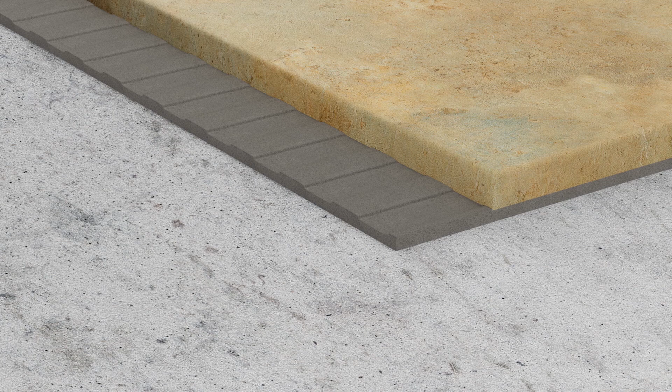Ceramic and stone tiles are the ideal surface coverings because they're beautiful, durable, hygienic, and easy to maintain. However, concerns over cracking can be a barrier to the selection of tile as a floor covering. The Schluter-DITRA uncoupling membrane is specifically designed to allow the installation of ceramic and stone tile over any even and load-bearing substrate.

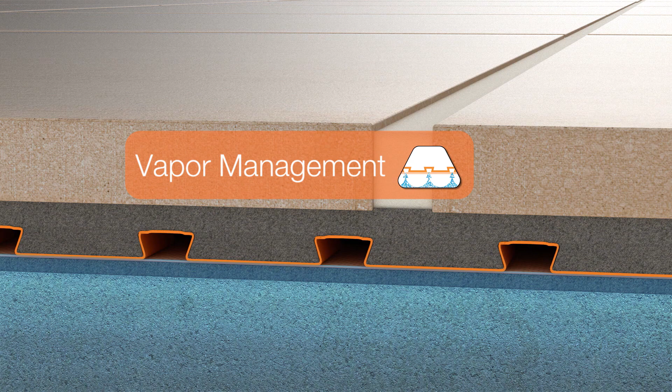DITRA performs 4 essential functions to help ensure success. Uncoupling allows the tile and substrate to move independently and neutralizes stresses that could otherwise cause cracked tile and grout. Waterproofing protects common moisture-sensitive building materials like plywood, OSB, and gypsum. Vapor management protects the tile assembly from the effects of residual moisture in the substrate. And support ensures the tile covering will remain intact when exposed to traffic.

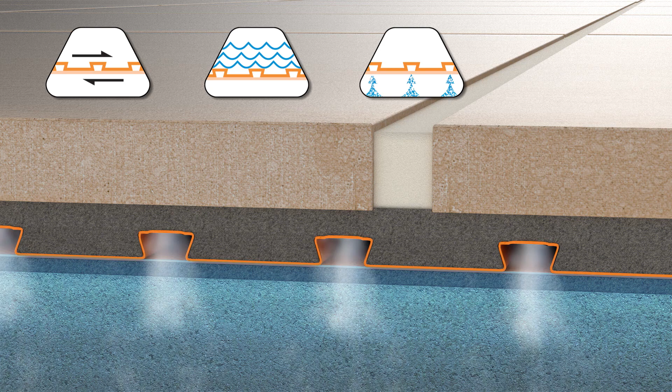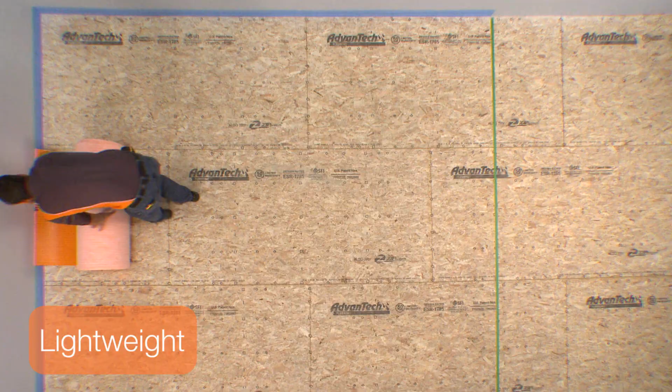The integration of DITRA's uncoupling, waterproofing, vapor management, and support functions makes it the universal underlayment for ceramic and stone tile. In addition to the functional benefits, DITRA is a practical solution that fits the needs of the installer. DITRA is lightweight, only 40 pounds per 323 square foot roll. This makes it easy to handle and transport to the job site.

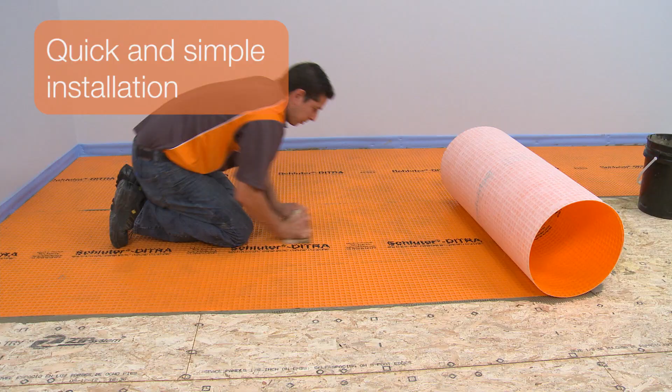DITRA is installed as quickly as you can spread thin-set mortar and requires no special tools or fasteners. Tile can be set immediately over the DITRA membrane, thus saving time on projects. With over 25 years as the industry leader in uncoupling technology, DITRA continues to provide successful, long-lasting tile installations.

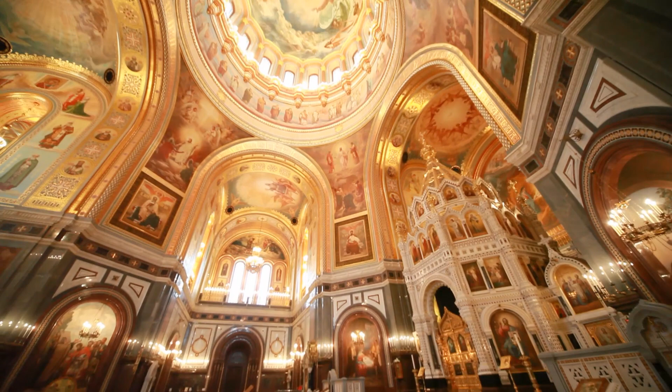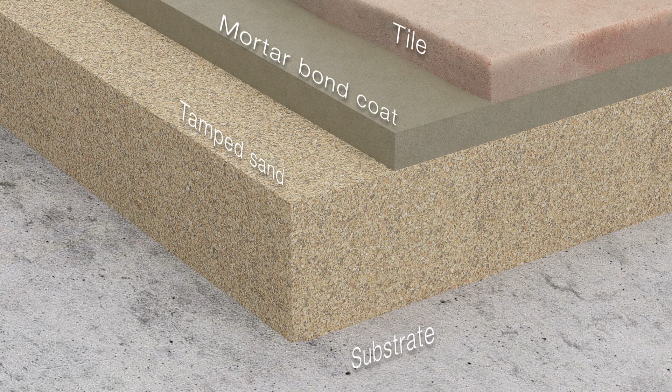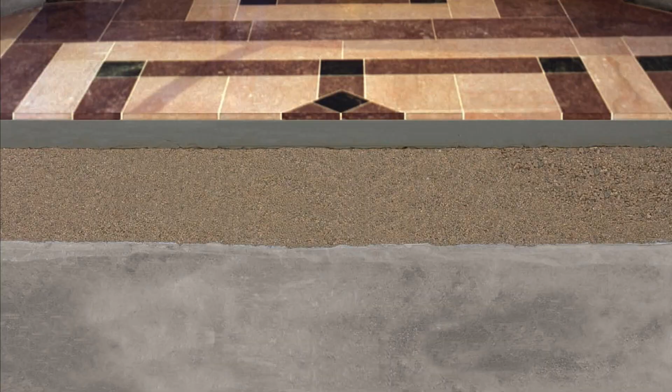Have you ever visited a centuries-old cathedral and wondered how the tile floors installed hundreds of years ago are still intact today? The secret is a layer of tamped sand placed between the structure and the tile assembly. The sand allowed the tile covering to move independently from the substrate. This uncoupling of the 2 layers prevented movement in the substrate from producing damaging stresses in the tile. In addition, the sand effectively distributed heavy loads to support the tile covering. The combination of uncoupling and support ensured lasting installations.

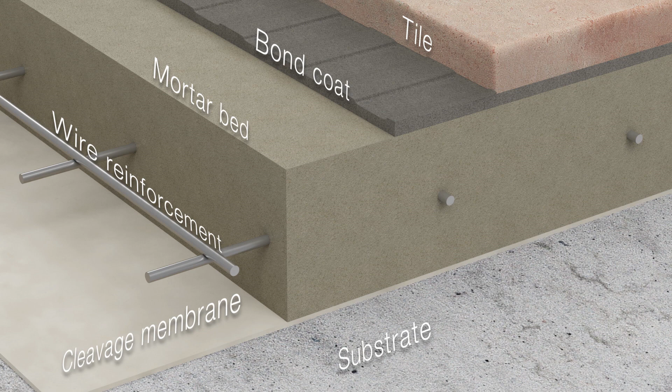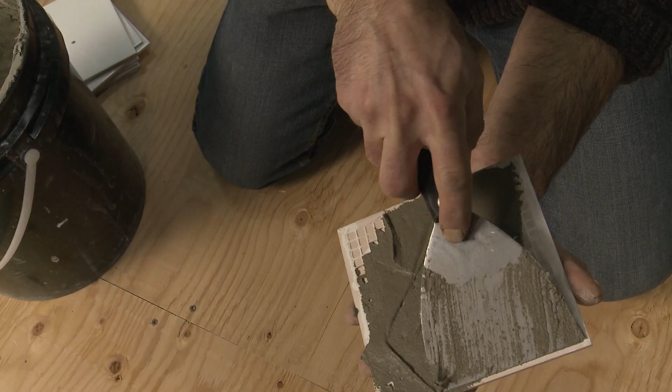A more recent installation method that functioned on the same principles is the wire-reinforced mortar bed over a slip sheet or cleavage membrane. In these applications, the cleavage membranes allowed for independent movement between the tile and the substrate, while the mortar bed provided the necessary support. Building practices and tile installation methods have changed considerably since the sand stratum method was commonly used.

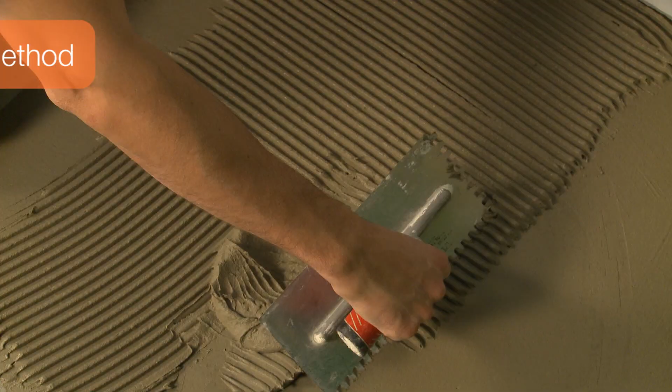The most fundamental change in the tile industry was the introduction of thin-set mortars in the 1960s. Originally designed to be used as bond coats in conjunction with the mortar bed method, these materials were eventually used to bond tiles directly to the substrate. Although the direct bond method was convenient and allowed thinner and lighter tile assemblies, the benefits of uncoupling were lost. When the tile is rigidly connected to the structure, movement in the substrate can produce damaging stresses in the tile covering.

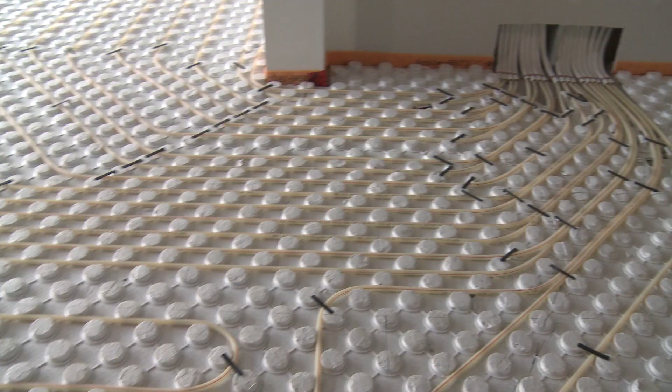Despite the drawbacks, the direct bond method became the standard for tile setting in most of North America. The risks associated with this method increased with the use of large format tiles, heated floor systems, fast-track building methods, and unstable materials such as plywood and OSB. Today, the need for uncoupling is greater than ever. In 1987, Schluter-Systems introduced the DITRA uncoupling and waterproofing membrane in an effort to improve the performance of thin-set tile assemblies.

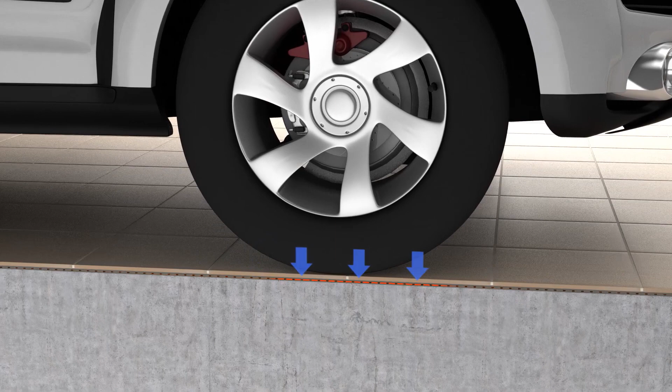DITRA was configured to provide lateral flexibility to allow independent movement between the tile covering and the substrate. This is the basis for the uncoupling function. The shape of the membrane also ensures proper support for the tile through the columns of mortar formed in the cavities on the top of the matting.

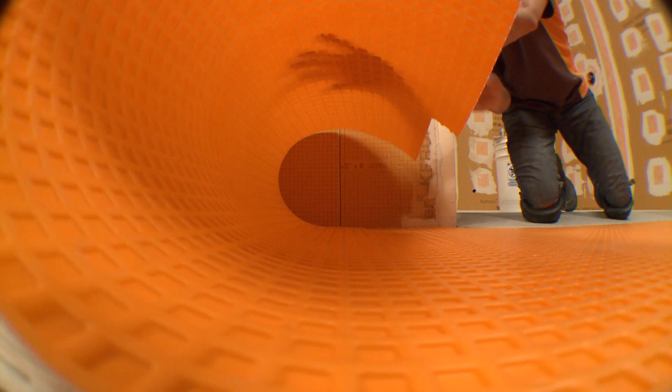DITRA provides reliable tile applications through the ancient wisdom of uncoupling and support, as well as the modern requirements of waterproofing and vapor management, in a method that matches today's building practices and tile installation techniques. Applying centuries' worth of knowledge has helped create long-lasting tile installations with the use of Schluter-DITRA.

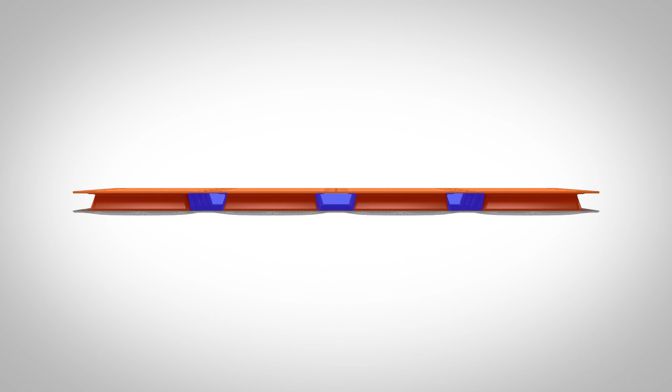Schluter-DITRA provides 4 essential functions to address the challenges presented by common tile substrates. DITRA is an uncoupling membrane with a grid structure of cut-back cavities and an anchoring fleece laminated to the underside. The cut-back cavities also create free space within the DITRA. The membrane is bonded to the substrate using thin-set mortar. Tile is installed over the membrane using the thin bed method. The cavities are filled with thin-set mortar, and additional mortar is combed over the top.

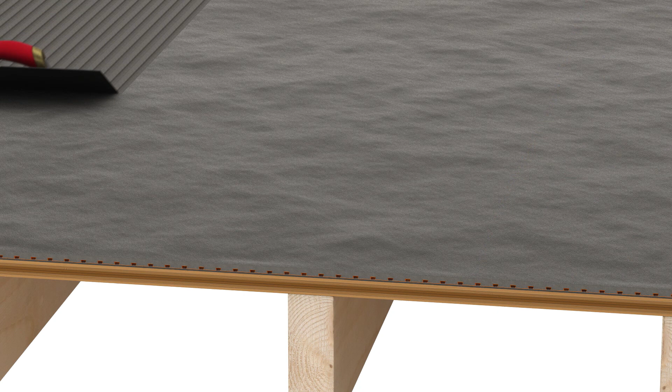The tiles are embedded in the mortar and grouted. Now, we'll demonstrate the 4 functions. All floors will expand and contract with changes in moisture content and temperature at a different rate than the tile. DITRA provides uncoupling through its open rib structure, which allows the substrate and the tile to move independently. This prevents the substrate movement from building up stress in the tile covering that could otherwise cause damage, like cracks.

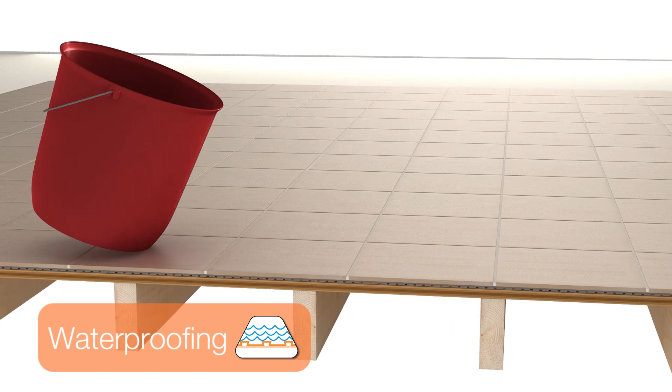Floors will also bend and deflect under load. The uncoupling function prevents this movement from causing damaging stresses in the tile covering as well. Tile coverings are not waterproof. Water can get through the tile covering to the substrate below. DITRA provides reliable waterproofing to protect moisture-sensitive substrates from water exposure.

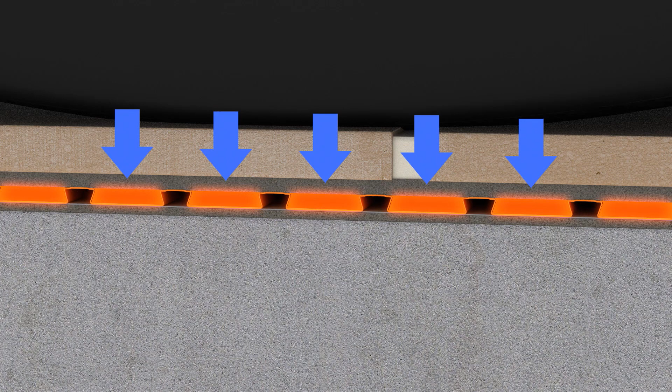The free space on the underside of DITRA provides a route for excess moisture and vapor to escape from the substrate. DITRA's vapor management function allows for tile installation over concrete cured less than 28 days and concrete on grade passing vapor. Loads are transferred from the tile covering through column-like mortar structures formed in the membrane to the substrate below. This design ensures tiles are properly supported when exposed to traffic.

The integration of uncoupling, waterproofing, vapor management, and support addresses the challenges presented by common tile substrates, such as plywood, OSB, concrete, and gypsum. This makes DITRA the universal underlayment for ceramic and stone tile.

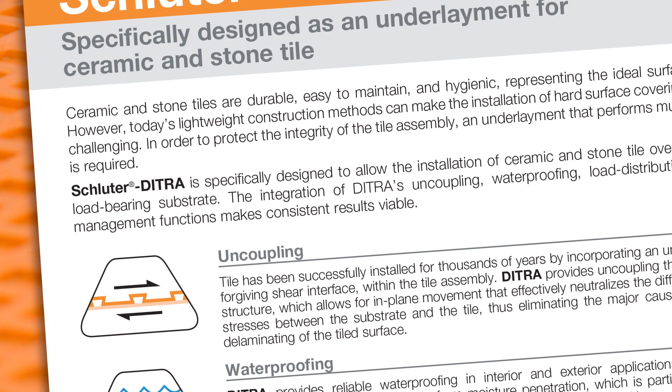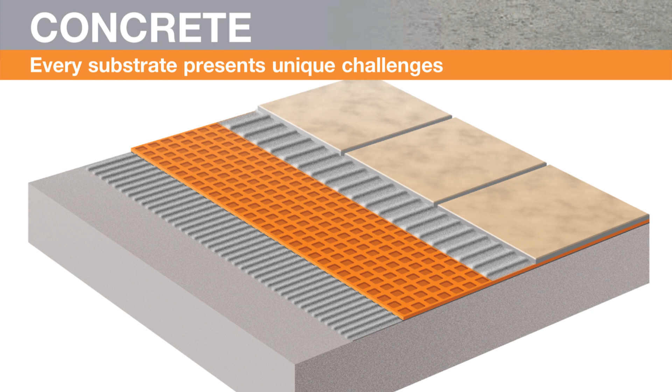The combination of DITRA's 4 functions allows for the installation of ceramic and stone tile over almost any even and load-bearing substrate. Typical substrates include plywood and oriented strand board, or OSB, including applications over joists spaced at 24 inches on center, young concrete, cracked concrete, and pre-stressed or post-tensioned concrete, poured gypsum underlayments, and heated floors, including hydronic and electric applications. Details for each of these substrates are contained within the DITRA Installation Handbook.

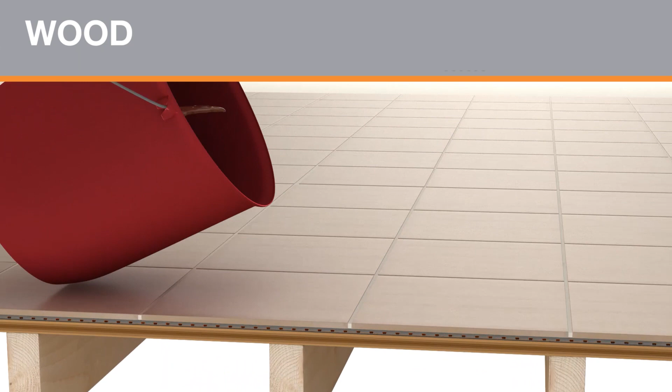Wood floors are subject to expansion and contraction with changes in moisture content and will bend and deflect under load. DITRA's uncoupling function protects the tile covering against these potentially damaging movement stresses. Furthermore, DITRA's waterproofing function guards moisture-sensitive wood materials against water infiltration.

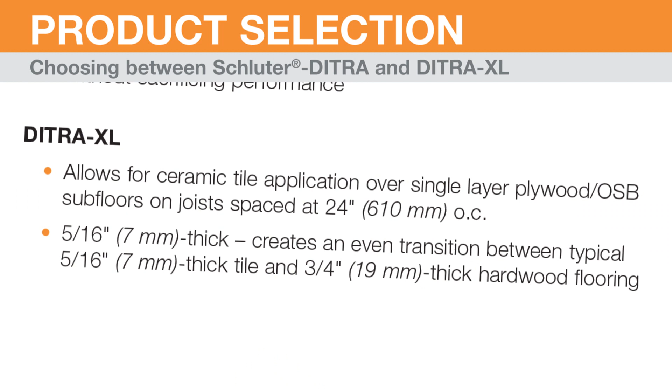Schluter-DITRA XL provides the same essential functions as DITRA, but is approximately twice as thick for increased uncoupling capacity. DITRA XL is optimized for use over bending and deflecting substrates, such as plywood and OSB. For example, DITRA XL allows for ceramic tile applications over single-layer plywood or OSB subfloors on joists spaced at 24 inches on center. It also creates an even transition between typical tile and hardwood flooring.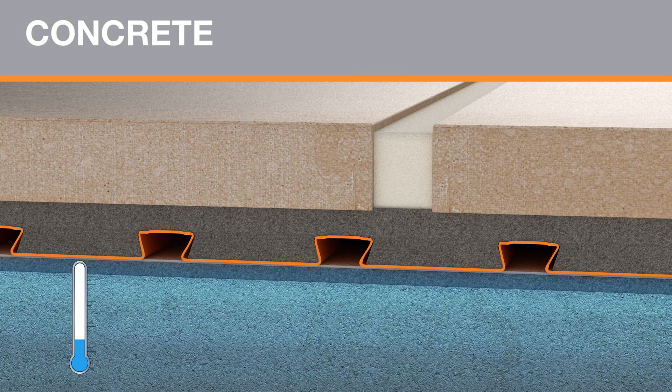Concrete is often thought of as a stable material, but it will expand and contract at twice the rate of tile with changes in temperature. Concrete also shrinks as it cures and dries after placement. These deformations make DITRA's uncoupling function essential. DITRA's vapor management function also enables tile to be installed over young concrete and concrete on grade subject to vapor emissions from below.

Similar to concrete, poured gypsum floors will expand and contract faster than tile with changes in temperature. This increases the need for uncoupling to protect the covering against movement stresses. Poured gypsum floors must dry out to gain strength and are sensitive to the reintroduction of moisture. DITRA's waterproofing and vapor management functions address these issues for reliable tile installations over gypsum.

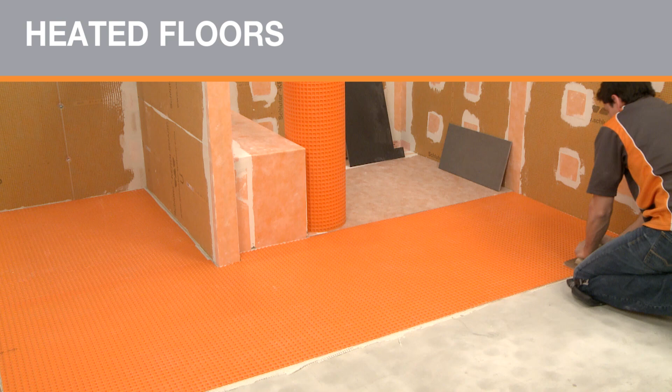Along with the substrate challenges already mentioned, movement stresses are magnified in heated floors, making uncoupling a particularly important feature of the tile assembly. The open channels below the DITRA can also promote even heat distribution to limit the potential for thermal striping.

Schluter-Systems also offers DITRA Heat, the only electric floor warming system that directly incorporates uncoupling to prevent cracked tiles and grout. Heating cables can be placed wherever floor warming is desired. Leveling compounds are not required to encapsulate the cables, which makes for a quick and easy installation. The integration of DITRA's uncoupling, waterproofing, vapor management, and support functions provides lasting installations over a wide range of substrates.

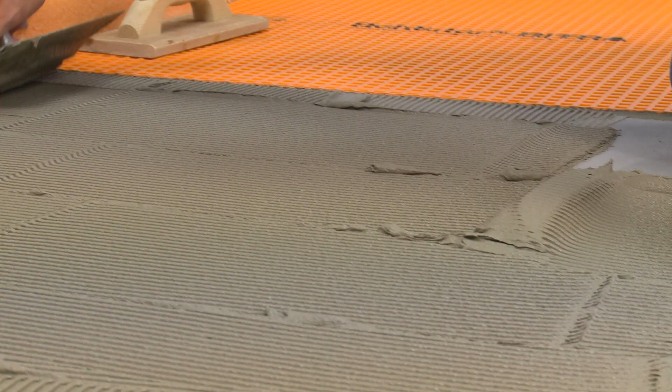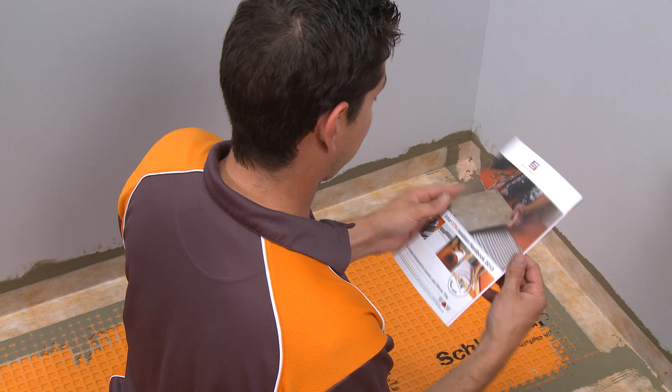Schluter-DITRA is specifically designed to allow the installation of ceramic and stone tile over any even and load-bearing substrate. The first step in a successful project is planning. The Schluter-DITRA Installation Handbook includes comprehensive installation guidelines and warranty criteria. The planning process starts by searching for the detail applicable to your project based on the substrate, tile type, and other factors. All requirements in the handbook are important. Please pay close attention to the setting materials and movement joints requirements when planning any DITRA project.

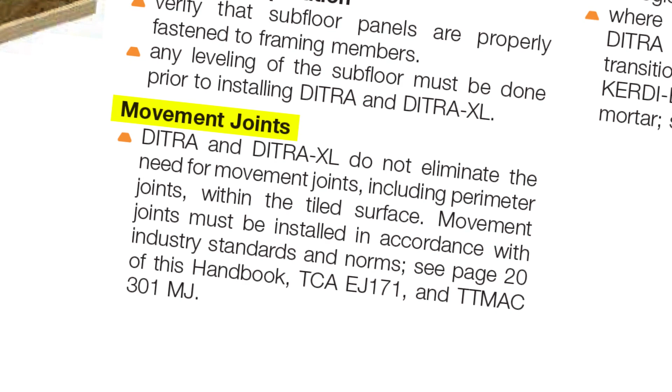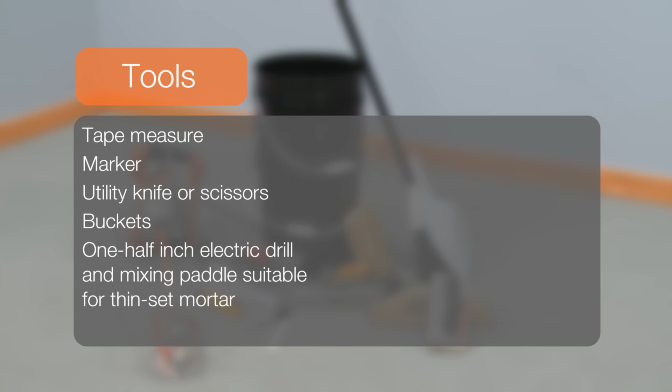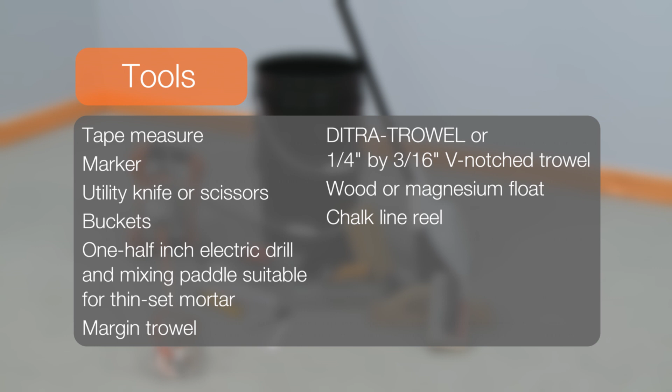Now we're ready to prepare for the installation. It is important to have a perimeter movement joint throughout the tile assembly. One option, as shown here, is to fasten a strip of sill seal, a compressible polyethylene gasket, to the surrounding walls to ensure a consistent joint along the perimeter.

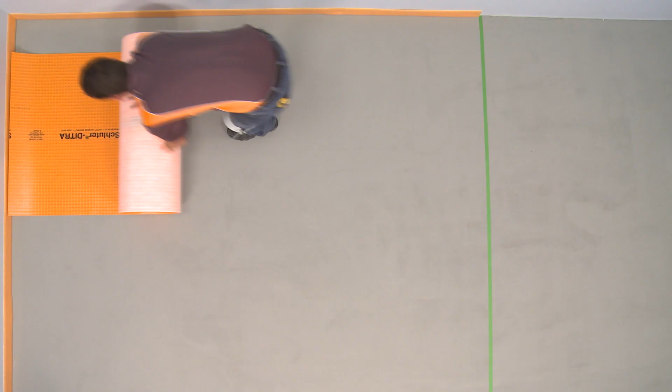The substrate must be clean, even, and load-bearing. Any leveling of the subfloor must be done prior to installing DITRA. Sweep the floor to remove any debris. Measure and cut the matting using a utility knife or scissors. Clean any dust from the substrate with a damp sponge. Now, we're ready to begin the installation.

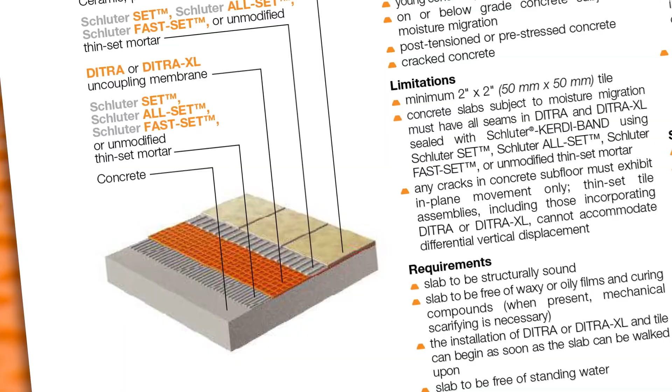DITRA is installed simply and easily with thin-set mortar. Any of the Schluter thin-set mortars can be used for installation of the matting over concrete. If you are not using a Schluter mortar, an unmodified thin-set mortar is used to install the matting over concrete. Always verify the proper type of mortar required to install DITRA based on the substrate. The mortar is mixed to a fairly fluid consistency, but still able to hold a notch.

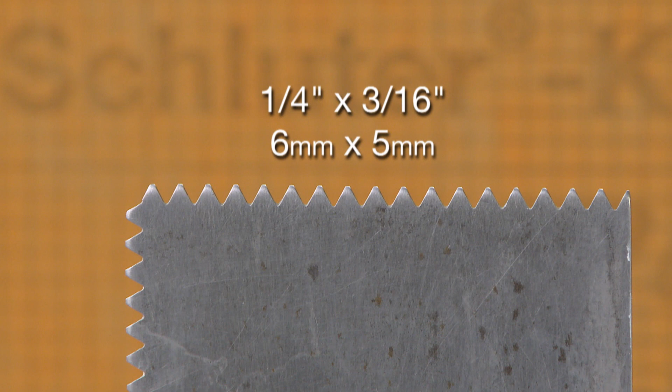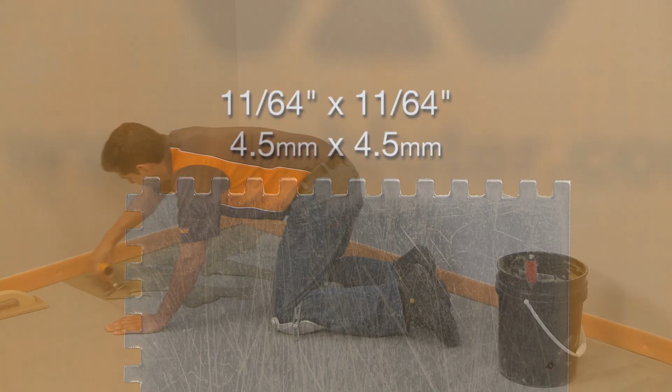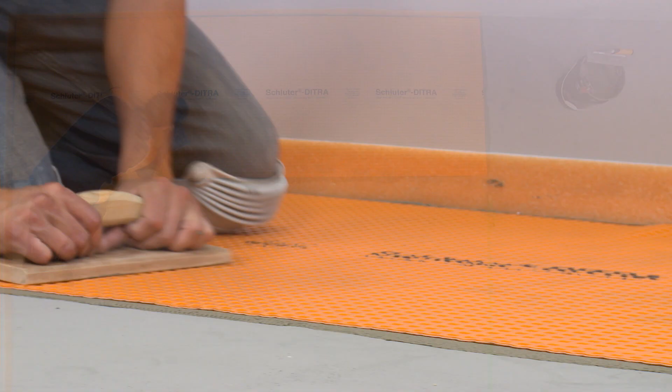A 1/4 inch by 3/16 inch V-notch trowel, or the Schluter-DITRA trowel, which features a 4.5 mm by 4.5 mm square notch design, is used to apply the mortar. Apply a thin layer of the mortar with the flat side of the trowel to produce solid contact with the substrate, and then comb additional mortar using the notch side of the trowel. Apply the DITRA fleece side down and solidly embed in the mortar using a float or the DITRA roller.

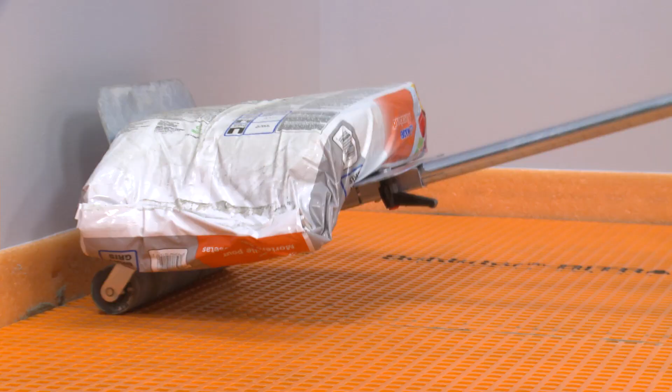When using the DITRA roller, place a weight on the shelf and slowly move the roller from one end of the matting to the other, slightly overlapping successive passes. Bags of thin-set mortar or grout or boxes of tile can be used as weight, provided the total weight is kept under 75 pounds. Make sure to observe the open time of the thin-set mortar. If the mortar skins over, remove and reapply fresh mortar before installing the membrane.

The risk of skinning is increased when installing a longer run of DITRA. Applying the mortar and embedding the membrane in shorter sections will help avoid this problem. When bonding DITRA to particularly dry, porous concrete, the slab should be moistened to saturate the concrete and help prevent premature drying of the mortar. Excess or standing surface water must be removed prior to installation.

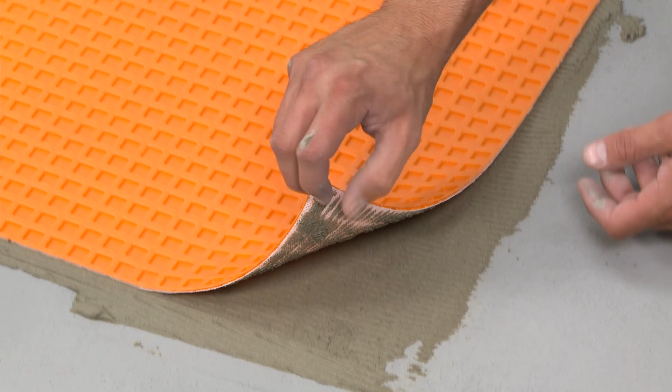Lift up a corner of the membrane to check coverage. Proper installation results in full contact between the fleece webbing and the thin-set mortar. Re-embed the membrane. Coverage may vary with mortar consistency, angle at which the trowel is held, membrane application, and other factors. If full coverage is not achieved, remove and reapply, making sure to observe proper installation techniques.

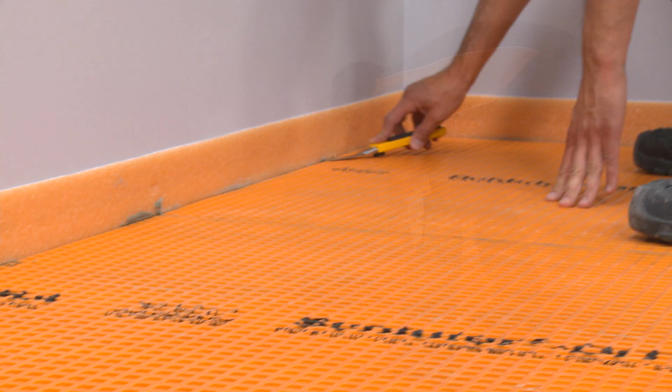For DITRA XL, use a 1/4 inch by 1/4 inch square notch trowel or the DITRA Heat DITRA XL trowel, which features a 1/4 inch by 1/4 inch square notch design. This process is repeated over the entire floor. Since we'll be installing a movement joint profile at the floor-to-wall transition, we need to cut the sill seal above the DITRA. Otherwise, we would leave the gasket in place until after the tile was set and grouted. The installation of the DITRA membrane is now complete.

Floors can be made fully waterproof with DITRA if desired by sealing seams and floor-to-wall transitions with Schluter-Kerdi waterproofing accessories. The Kerdi accessories can be installed using any of our Schluter thin-set mortars or an unmodified thin-set mortar. The mortar is mixed to a fairly fluid consistency, but still able to hold a notch. A 1/4 inch by 3/16 inch V-notch trowel or the Schluter-Kerdi trowel, which features a 1/8 inch by 1/8 inch square notch design, is used to apply the mortar.

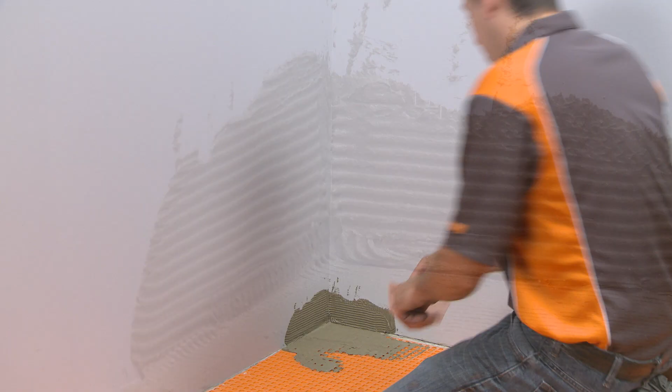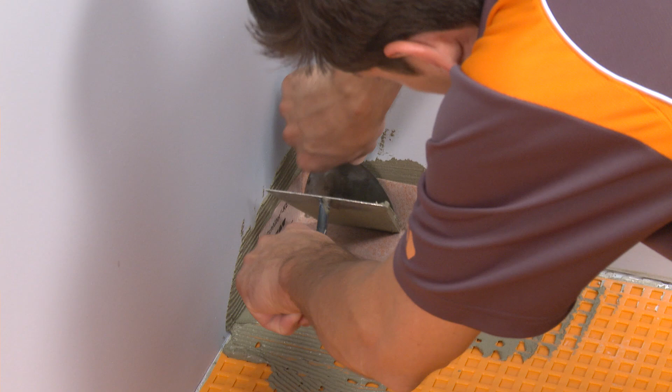Apply thin-set mortar to the area where the Schluter-Kerdi-Kereck corners are to be installed. Fill the cavities in the DITRA matting and comb additional mortar using the notched side of the trowel. Embed the Kerdi-Kereck into the thin-set mortar using the flat side of the trowel or a drywall finishing knife. Corner installation may be simplified by holding one side of the corner in place while embedding the other side of the corner in the mortar.

Schluter-Kerdi-Band waterproofing strips are used to seal seams and floor-to-wall connections. The band may be creased prior to installation to help maintain tight corners and simplify subsequent tile setting. Apply thin-set mortar to the area where the Kerdi-Band is to be installed.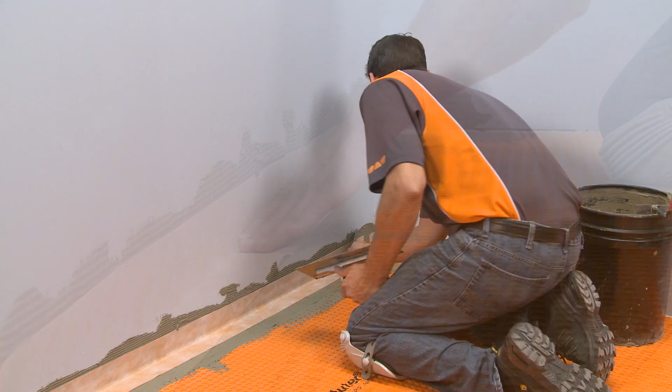Embed the Kerdi-Band in the thin-set mortar using the flat side of the trowel to ensure full coverage and remove air pockets. Note that a 2-inch overlap can be achieved at Kerdi-Kereck corners without continuing the Kerdi-Band all the way to the corner. This will limit buildup of the membrane in these areas. This process is repeated at remaining floor-to-wall transitions and DITRA seams. Always ensure that a minimum 2-inch overlap is achieved at all locations.

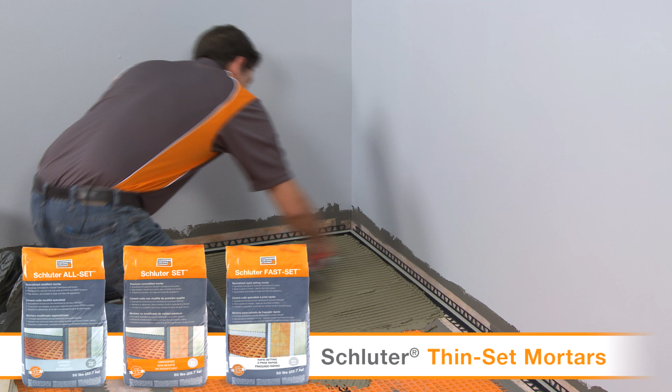The waterproofing application is now complete. Tile may be installed immediately over DITRA using any of our Schluter thin-set mortars or an unmodified thin-set mortar. We have already figured out our tile layout and have applied chalk lines to guide our installation. Hairspray helps ensure the chalk doesn't easily wipe off the membrane. The hairspray will not act as a bond breaker because the thin-set mortar is mechanically locked into the top of the membrane.

Fill the cutback cavities with thin-set mortar. Then, comb additional mortar over the matting using a notched trowel that is appropriate for the size of the tile. Back-buttering large format tiles is a useful way to help ensure proper coverage. The skim coat can fill in the concave area on the back of the tile and improve contact with the mortar combed on the substrate.

Solidly embed the tiles in the setting material, making sure to observe the open time of the mortar. Slide the tile back and forth to collapse the mortar ridges and transfer the mortar to the back of the tile. Periodically remove a tile to check coverage. Run a margin trowel through the bond coat and slide the tile before pulling up to avoid creating tension on the surface of the DITRA. This is especially important soon after the matting installation.

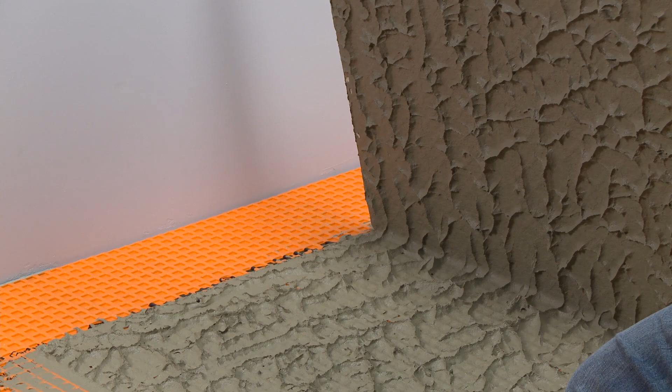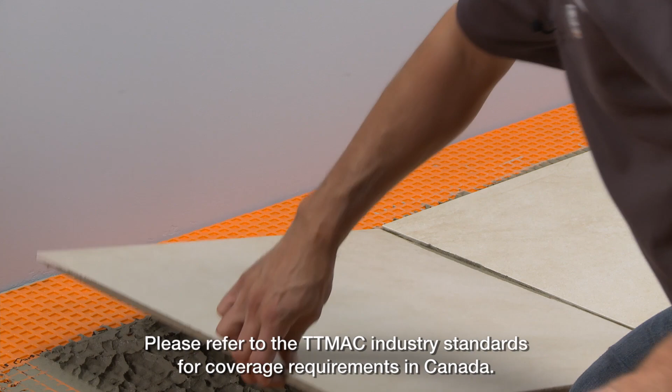Proper installation results in full coverage of the mortar to the back of the tile. Industry standard guidelines for ceramic tile require a minimum of 80% coverage in dry areas and 95% coverage in wet areas. Tile edges and corners must be fully supported. If sufficient coverage is not achieved, remove the tile and reapply, making sure to verify proper mortar consistency, application, and tile embedding techniques. Consider back-buttering large format tiles. Continue setting the remaining tile.

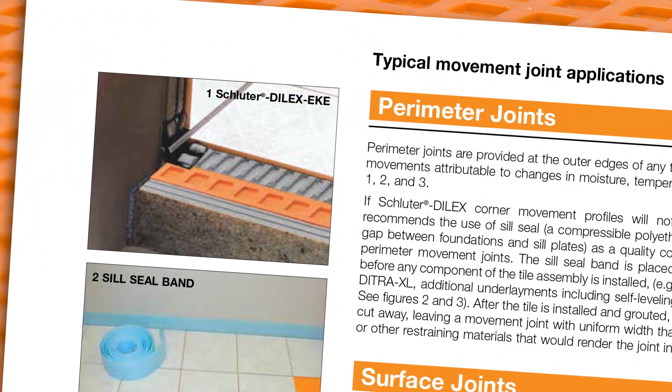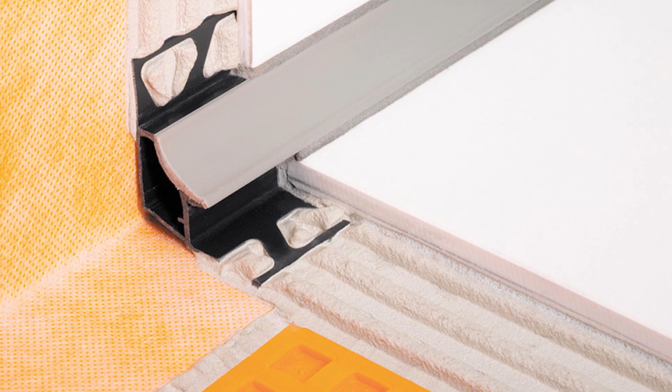Profiles are a useful tool to enhance any floor tile installation. DITRA does not eliminate the need for movement joints within the tile covering. This includes perimeter joints at restraining surfaces, such as walls. As an alternative to sealant, Schluter-DILEX movement joint profiles accommodate movement and protect tile edges, resulting in a permanent, maintenance-free installation. DILEX-EKE creates a discreet, uniform joint at floor-to-wall transitions. DILEX-BWS matches common grout joint widths and is available in a variety of colors, allowing it to blend into the tile field.

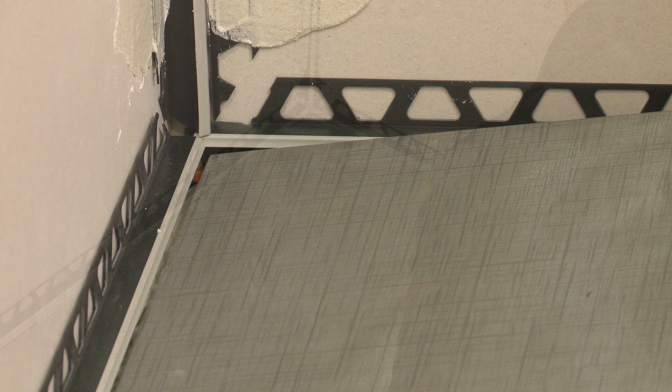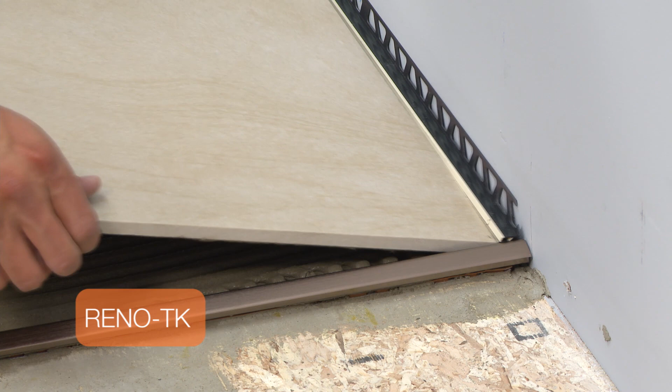Because ceramic and stone tiles are inherently brittle, their exposed edges can chip and crack if left unprotected. Transitions between floor surfaces and at thresholds are particularly vulnerable to damage. Schluter-Systems offers a variety of floor profiles to provide edge protection and transitions at thresholds and between adjacent surfaces. For example, Schluter-RENO-TK is designed to provide a smooth transition from tile coverings to floor coverings at lower elevations, typically carpet. Wall profiles like Schluter-RONDEC or QUADEC make it possible to create a tile base using field tiles without ceramic trim. This simple approach increases the utility of the room and produces a clean, finished appearance.

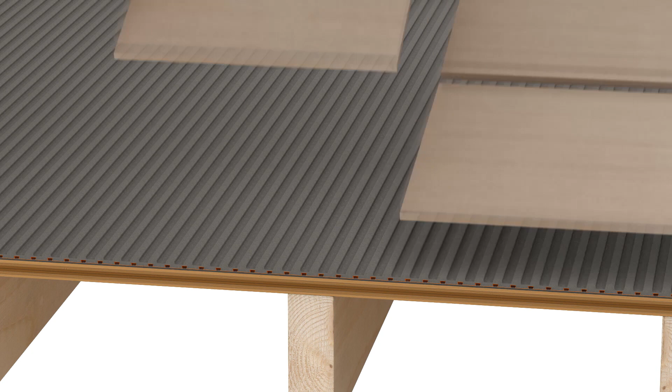Ceramic and stone tiles are the ideal surface coverings because they're beautiful, durable, hygienic, and easy to maintain. However, the long-term performance of the covering depends on the installation method. The integration of Schluter-DITRA's uncoupling, waterproofing, vapor management, and support functions ensures consistent success over common tile substrates.